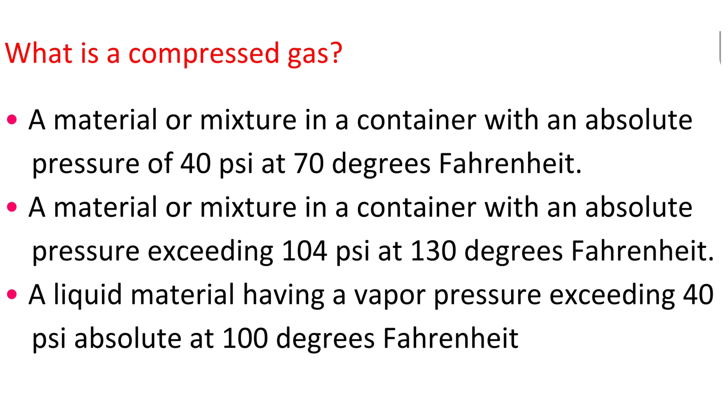A material or mixture in a container with an absolute pressure exceeding 104 psi at 130 degrees Fahrenheit. A liquid material having a vapor pressure exceeding 40 psi absolute at 100 degrees Fahrenheit.

Question: do compressed gas cylinders need to be inspected? Answer: employers must visually inspect compressed gas cylinders to determine that they are in safe condition. Visual inspections must be conducted as prescribed in the Hazardous Materials Regulations.

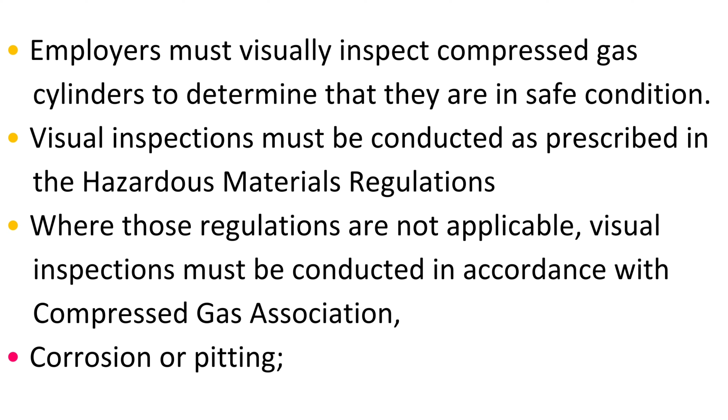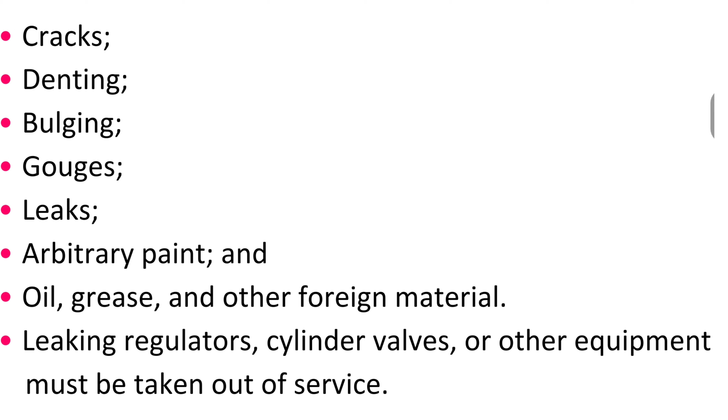Where those regulations are not applicable, visual inspections must be conducted in accordance with Compressed Gas Association. Corrosion or pitting, cracks, denting, bulging, gouges, leaks, arbitrary paint, and oil, grease, and other foreign material, leaking regulators, cylinder valves, or other equipment must be taken out of service.

Question: how do compressed gases need to be marked? Answer: ensure that cylinders, containers, pipes, etc. are clearly marked so that the gas can be easily identified. Labels should not be defaced or removed. Do not accept or use containers whose content labels are not legible. Segregate these items and return them to the supplier.

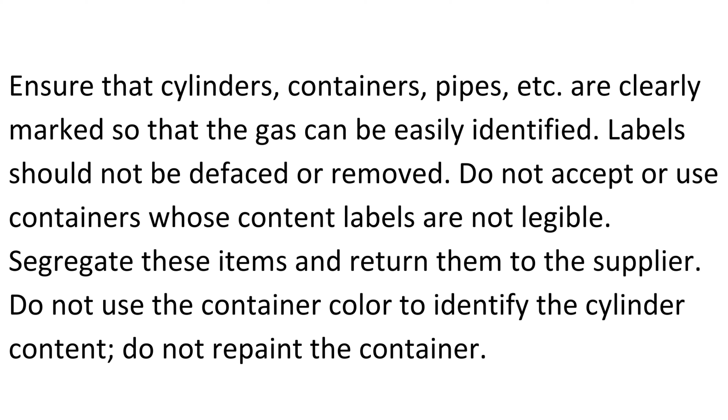Do not use the container color to identify the cylinder content. Do not repaint the container. In addition, all gas lines leading from a compressed gas supply should be clearly labeled or identified. Some states require specific labeling of cylinders, containers, and pipes.

Question: how must compressed gases be separated during storage? Answer: employers should always refer to the manufacturer's storage requirements and safety data sheet. However, compressed gases should be grouped and stored based on their hazard class.

For example, separation must be maintained between fuel and oxidizing gases and oxygen, but inert gases may be stored next to either. Provide adequate space or segregate by partitions and post a conspicuous sign that identifies the gas or hazard class. Storage areas should be dry, well-drained, ventilated, and fire-resistant.

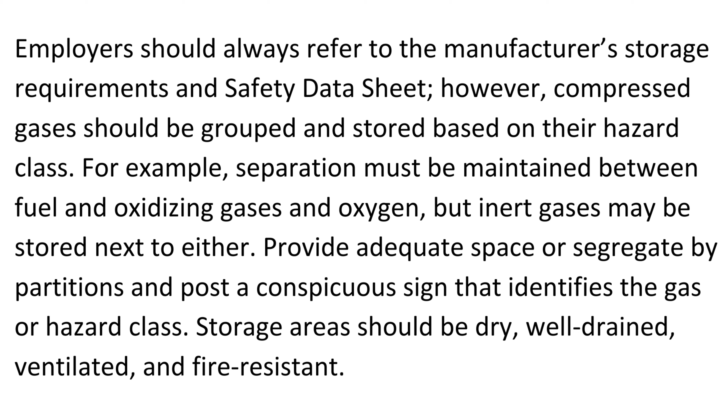Question: how must compressed gas cylinders be stored? Answer: storage areas must be designed to accommodate the various gases with adequate spacing or segregation by partitioning so that containers can be grouped by hazard. Storage areas must be dry, well-drained, ventilated, and fire-resistant.

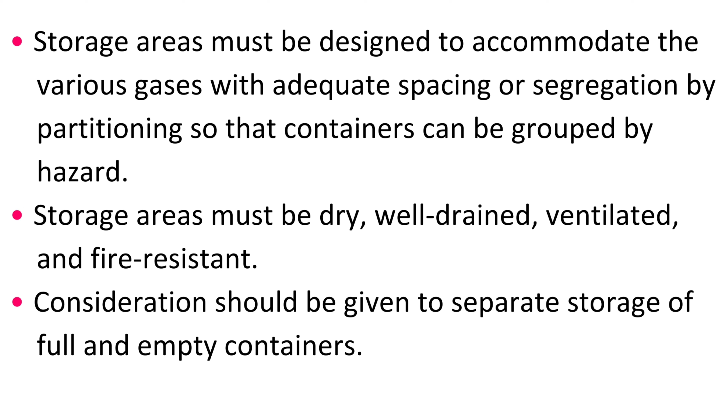Consideration should be given to separate storage of full and empty containers. Temperatures in the storage area must not exceed 125 degrees Fahrenheit. There must be adequate separation from combustibles as specified by federal, state, and local regulations. There must always be a valve protection cap, if provided, in place.

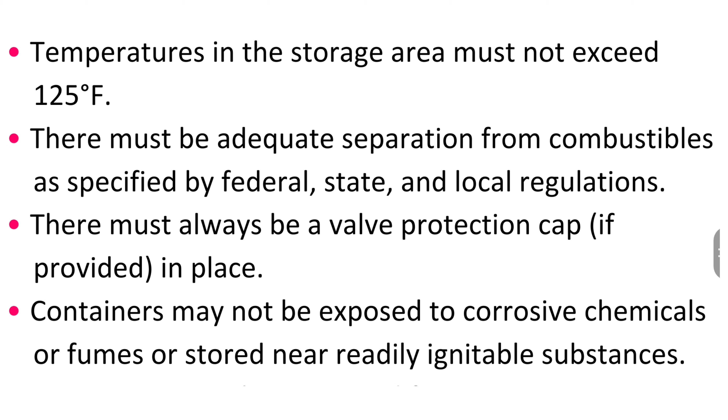Containers may not be exposed to corrosive chemicals or fumes or stored near readily ignitable substances. Containers must be protected from cuts, punctures, or other abrasions of the metal. Containers must be secured with brackets, chains, or straps to prevent falling or damage.

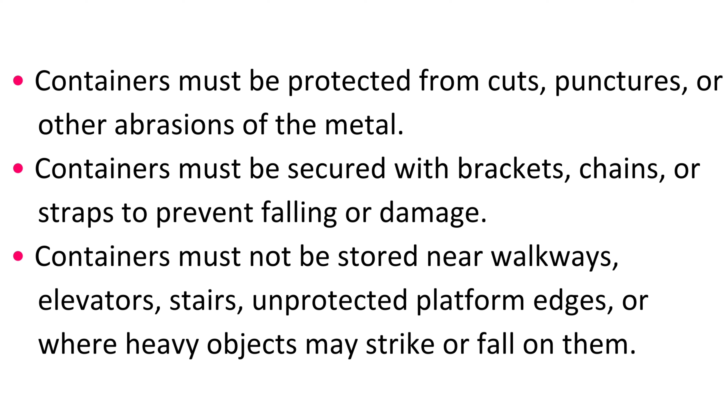Containers must not be stored near walkways, elevators, stairs, unprotected platform edges, or where heavy objects may strike or fall on them. The method of storage must not expose the cylinders to tampering by unauthorized persons.

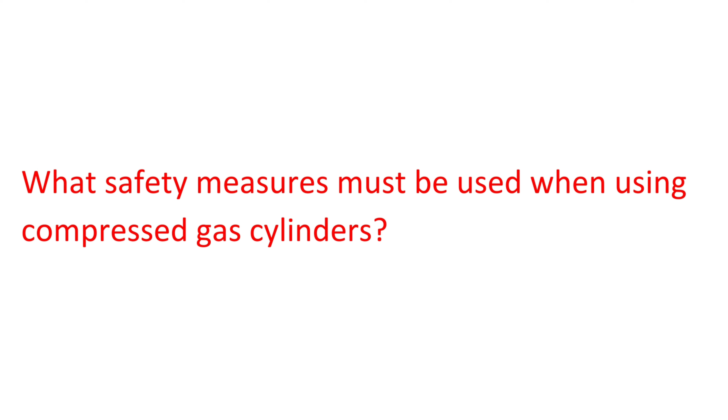Question: what safety measures must be used when using compressed gas cylinders? Answer: cylinder valves must be closed when work is finished. Cylinder valves must be closed before moving cylinders. Cylinders must never be used as rollers or supports, whether full or empty.

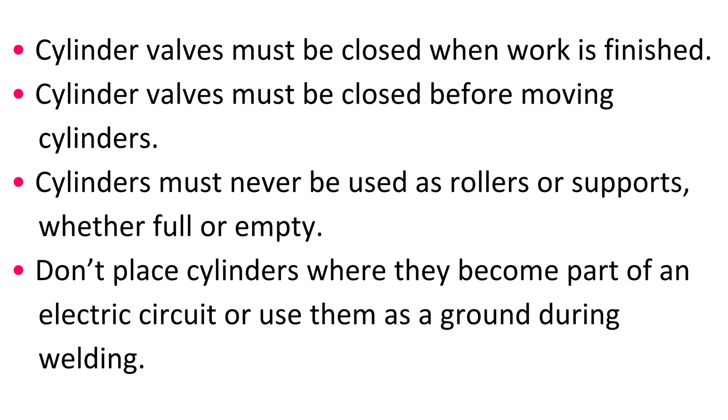Don't place cylinders where they become part of an electric circuit or use them as a ground during welding. Don't subject cylinders to temperature extremes. Unless connected to a manifold, oxygen from a cylinder must not be used without first attaching an oxygen regulator to the cylinder valve.

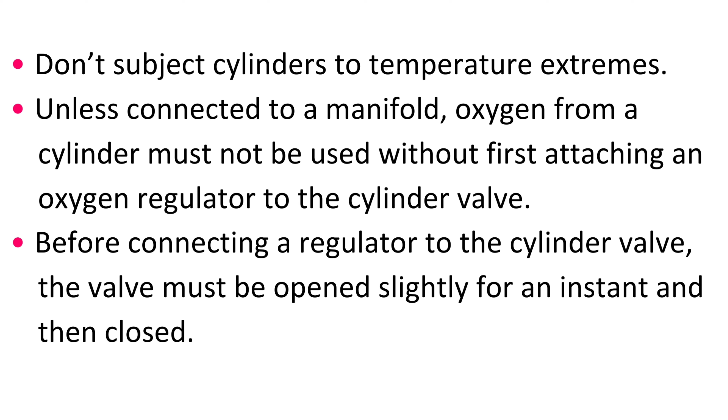Before connecting a regulator to the cylinder valve, the valve must be opened slightly for an instant and then closed. Avoid dragging or sliding cylinders. Don't lift cylinders by the caps. Move cylinders with a suitable hand truck, lift truck, or crane with a cradle or platform. Never drop cylinders or strike them against one another or other surfaces.